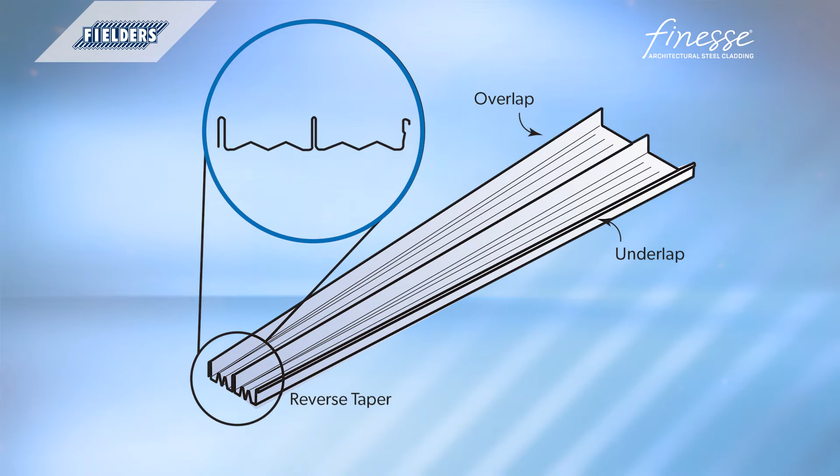The truly flexible Fielders Shadowline 305 is available as a flat pan profile at 305mm cover width, a fluted 300mm cover width with subtle concertina type longitudinal pan stiffeners, tapered with concertina type stiffeners running longitudinally in the pans, providing cover width varying from a wide end of 305mm down to a narrow end as low as 145mm. Shadowline is available in a 0.7mm base metal thickness.

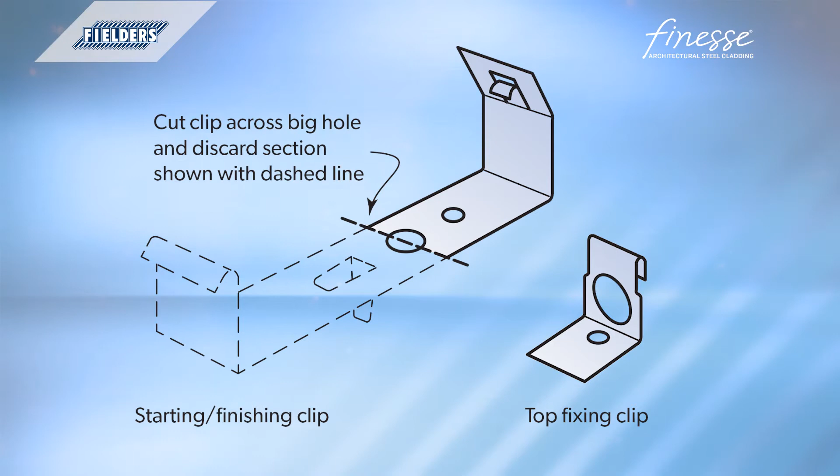Fielders Shadowline 305 cladding is concealed fixed to supports. This means that clips are screwed to the supports and no fastener passes through the sheeting. There are two types of fixing clips, a top fixing clip and a start finishing clip to fasten the first and last sheets in a roof area. Fix the clips using wafer head screws into either steel or timber battens. The concealed fixed clips for Shadowline 305 allow for some alleviation of expansion and contraction of the sheeting, and lengths up to 24 metres may be readily achieved.

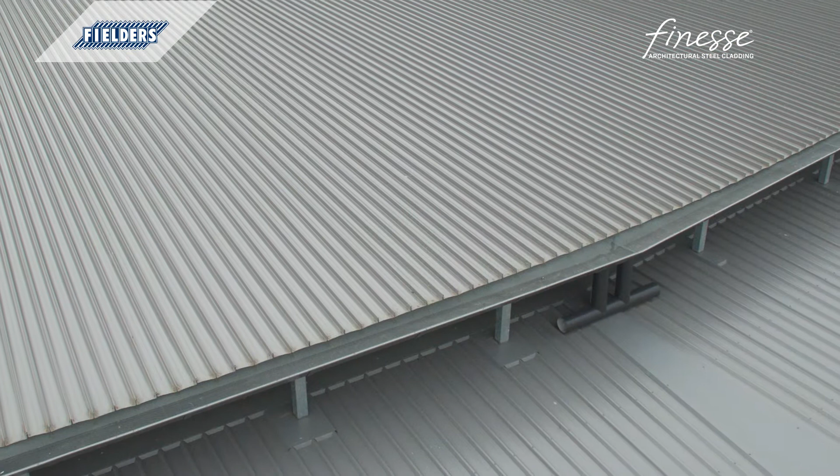A feature of standing seam roof profiles such as Fielders Shadowline 305 is that the roof cladding can be aligned with a vertical wall cladding to create a seamless flow from roof to wall. This feature is known as a mansard roof detail. More on that shortly, but first we need to prepare the fixing surface.

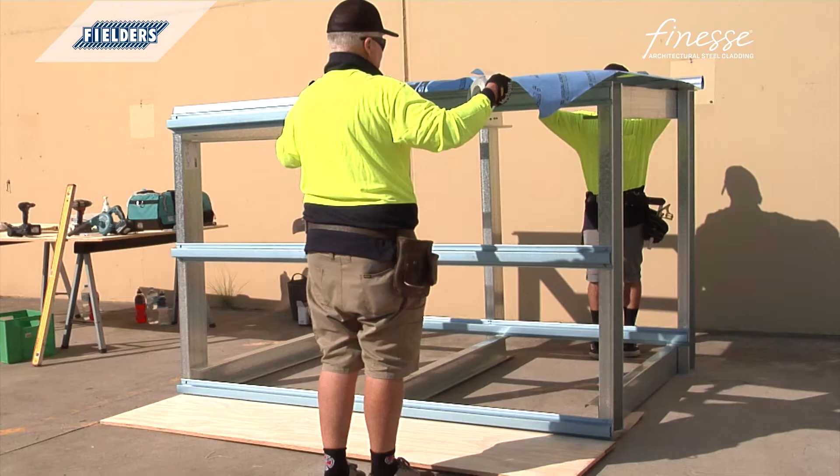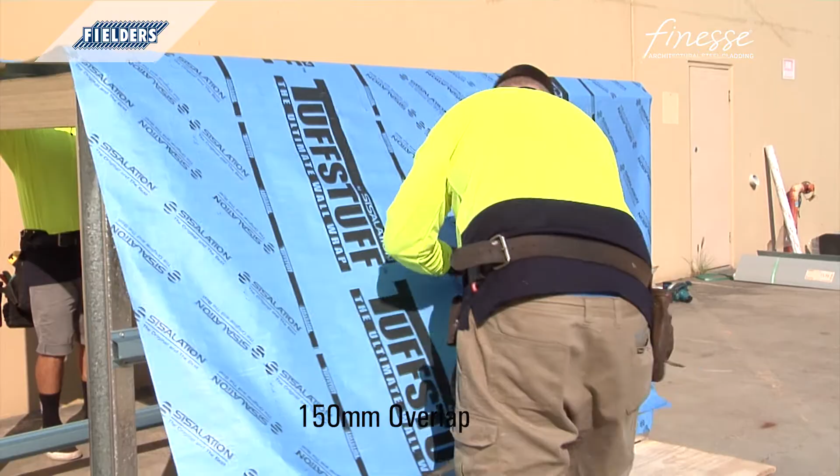It's good practice to install a heavy-duty roof sarking to both roofing and wall applications of Fielders Shadowline. Seal at the top. Ensure there are no ripples or puckers. Make all the laps in the sarking with a 150mm lap. Tape with Sisalation tape on at least the outside face. Best practice would be to seal the lap with double-sided tape first. Follow the manufacturer's installation recommendations.

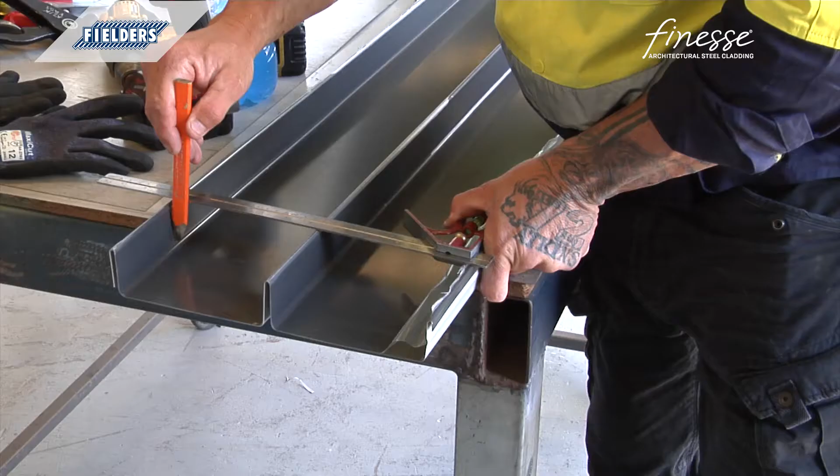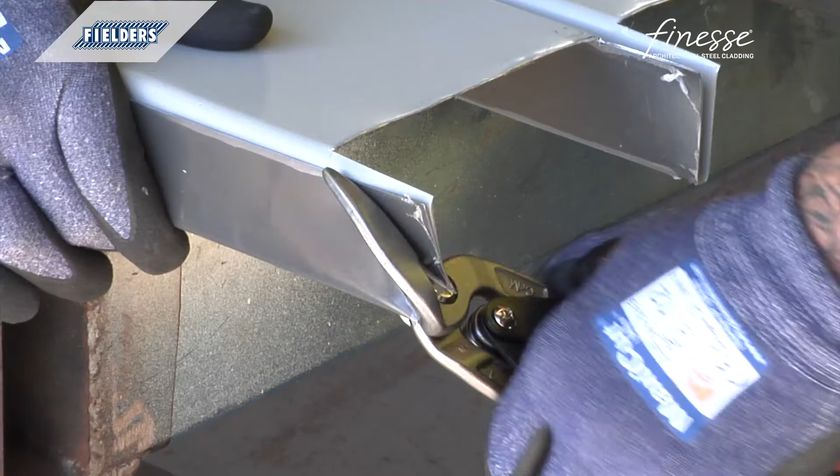With the mansard detail, you'll need to order your wall sheets over length to allow folding the pan and creating an underlap to the first perpendicular roofing batten. Similarly, the roofing sheets will need to be ordered over length to take into account the rib protrusion, so at least 50mm over length.

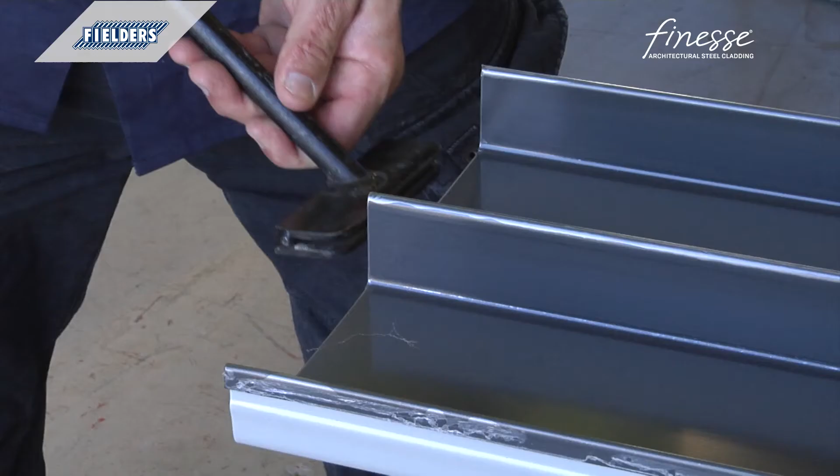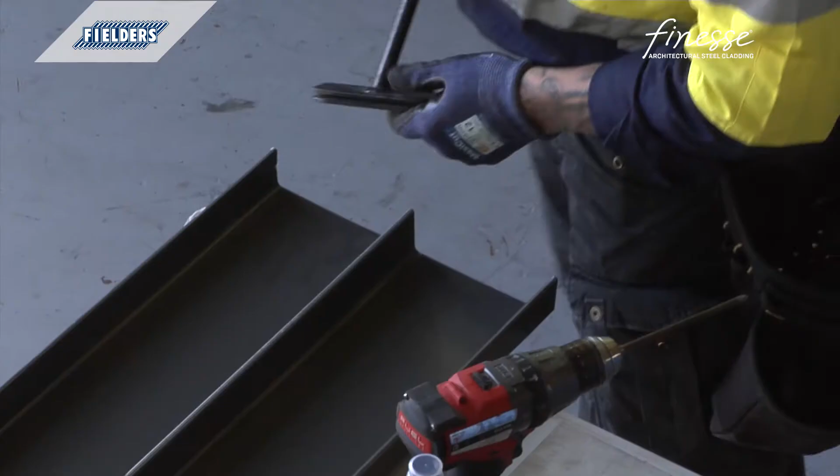A number of special tools are needed for Shadowline installation: a rib closer tool, a pan turn up, turn down tool, and the button punch tool. These tools are all available from Fielders. To create the turn up, at the top of the sheet, fit the tool over the end of the tray as far as it'll go. Then, push the handle to form a turn up as close to 90 degrees as possible. You can turn up sheets anytime. If you do it after they're fixed, make sure there's sufficient clearance to operate the tool effectively.

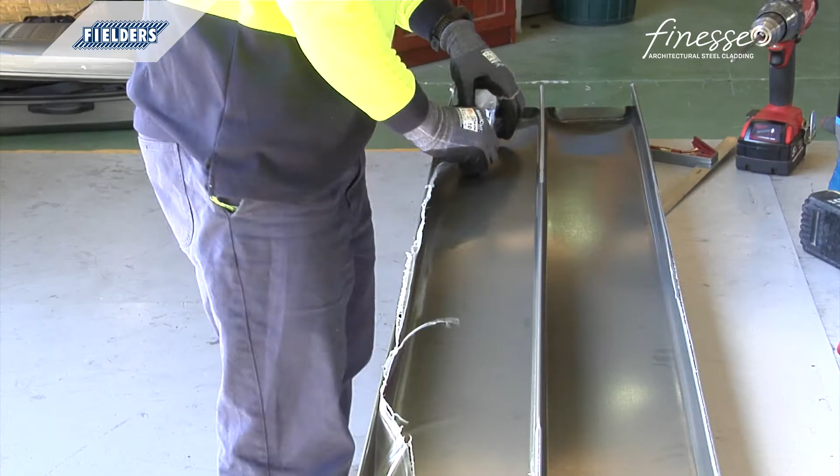For maximum weather tightness, lay sheets towards prevailing weather. Before lifting sheets onto the roof, check that they're the correct way up. Also, that the overlapping side is towards the edge of the roof from which the installation will start. You'll find this much easier and safer than trying to turn sheets on the roof. Place bundles of sheets over or near firm supports, not at mid-span of roof members. Remove the protective film just from the underlap rib as you go to prevent it getting trapped in the overlap. Only fully remove the sheet protection when work is complete.

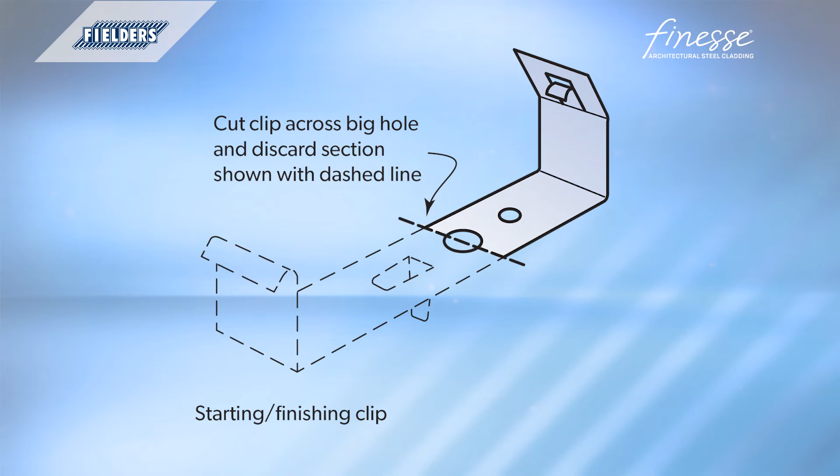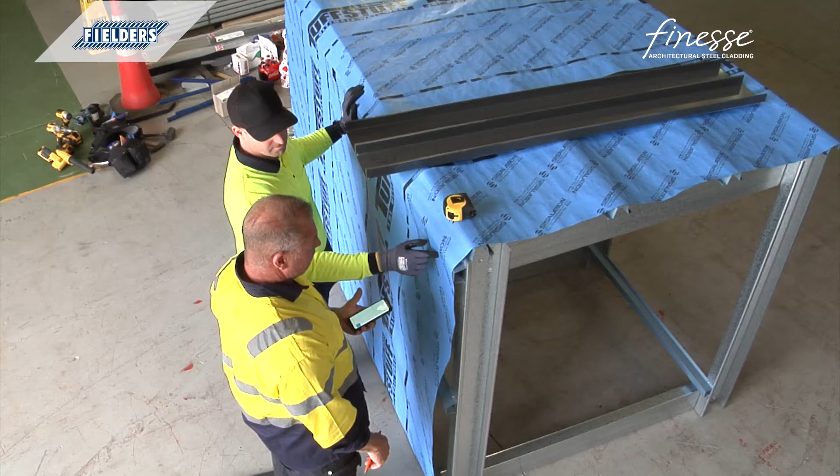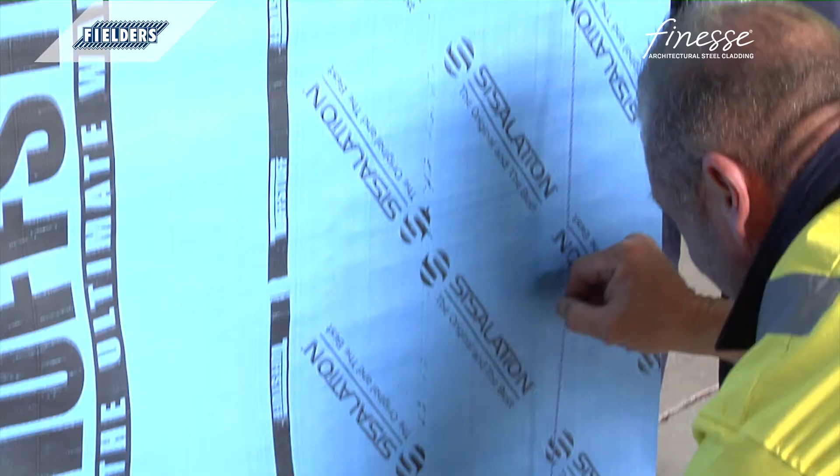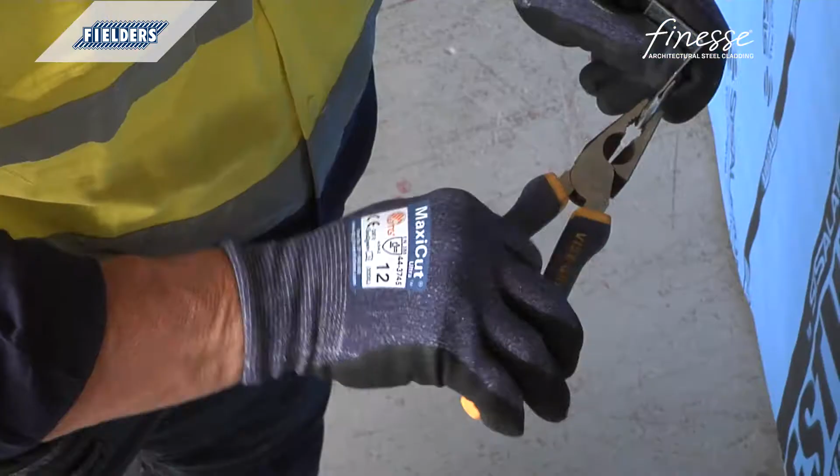In preparation for laying sheets, start by cutting all starting finishing clips across the big hole in the clip and discard the unwanted pieces. To ensure that barge flashings are equal on each side of the roofing run, attention should be given to aligning the first sheet, considering the roof run and sheeting cover. Determine the location of the first wall sheet and mark the edge of the sheet across the battens using a string line or similar. Prepare and fix the first row of clips to the wall and roof. Use either the prepared starter clips as outlined earlier, or if using the standard top fixing clips, flatten the fold over so that the clip fits more easily in the female rib of the Shadowline.

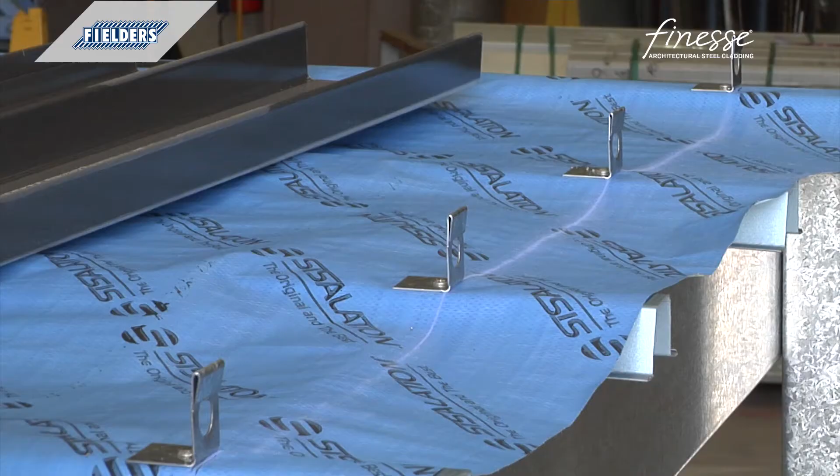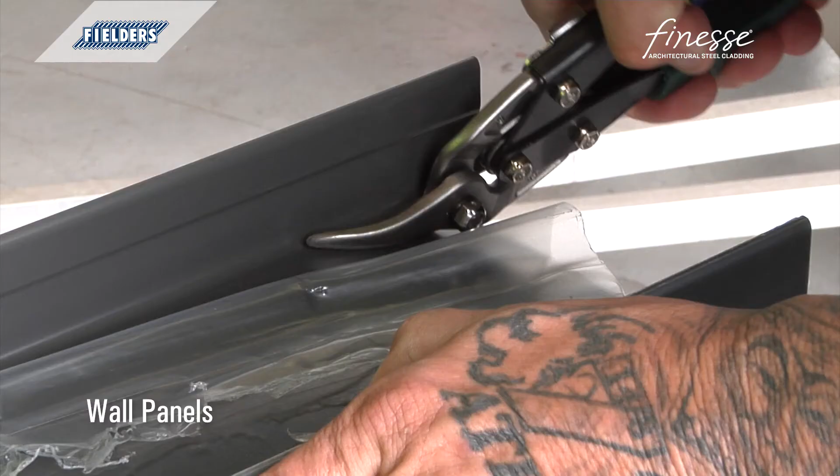Place the first wall sheet in position up against the clips. Mark the position of the fold in place at the height of the roof intersection. Carefully cut the pans of the wall sheet alongside each rib. Create a neat fold to match the roof pitch. Check in place. Use a rubber mallet if necessary to flatten the fold to match the roof pitch evenly.

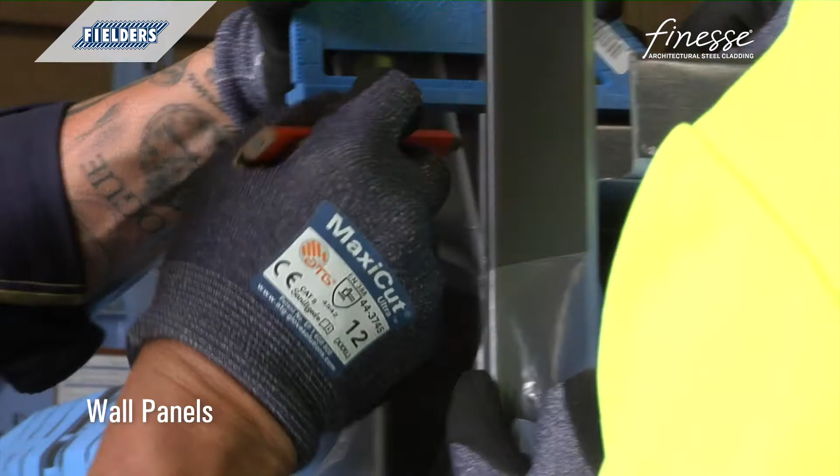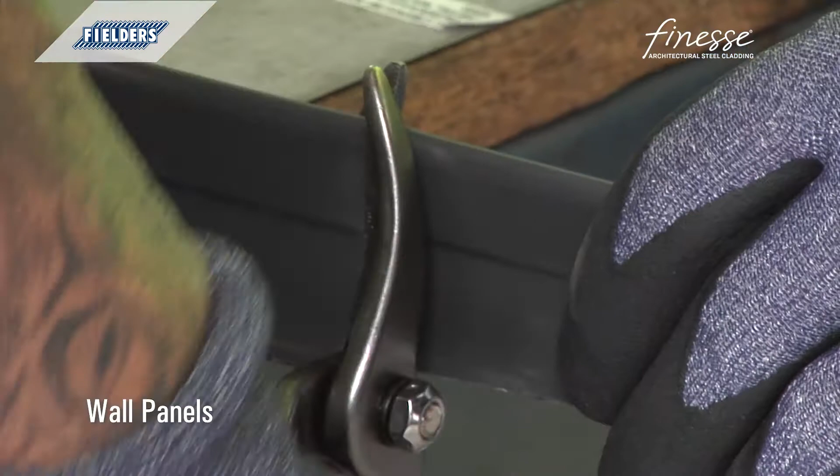Place a roof sheet in position. Mark the protruding wall ribs to the roof rib height. Cut the wall ribs back to roof rib height so as to allow the roof ribs to sit over the wall ribs. Now trim and flatten the protruding ribs to have as flat a profile as possible, again to allow the roof ribs to fit more easily over the vertical ribs.

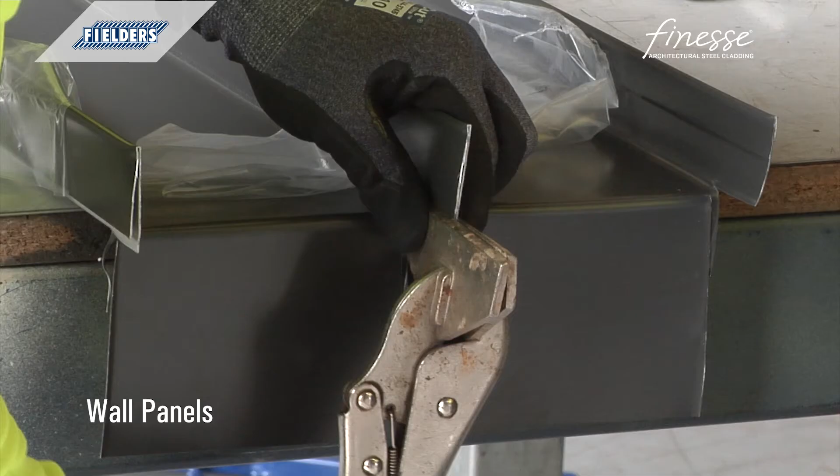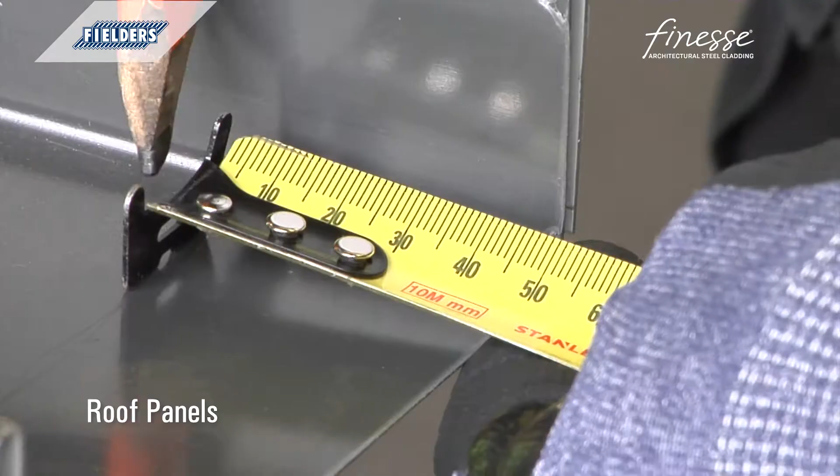Mark the roof rib pans to cut back to the roof wall intersection line in place or to the rib height of 48mm. Cut back the roof rib pans to form a neat edge at the roof wall intersection.

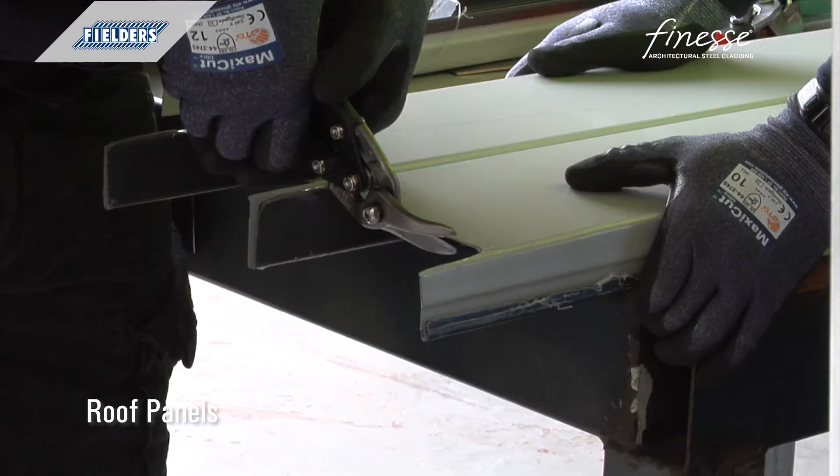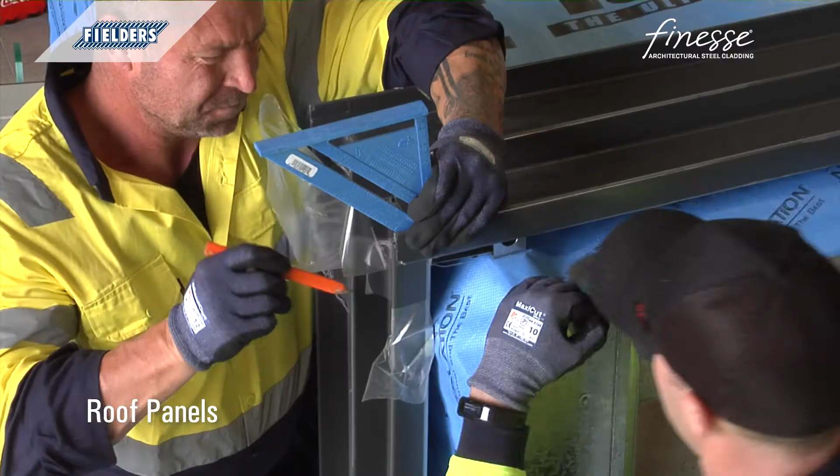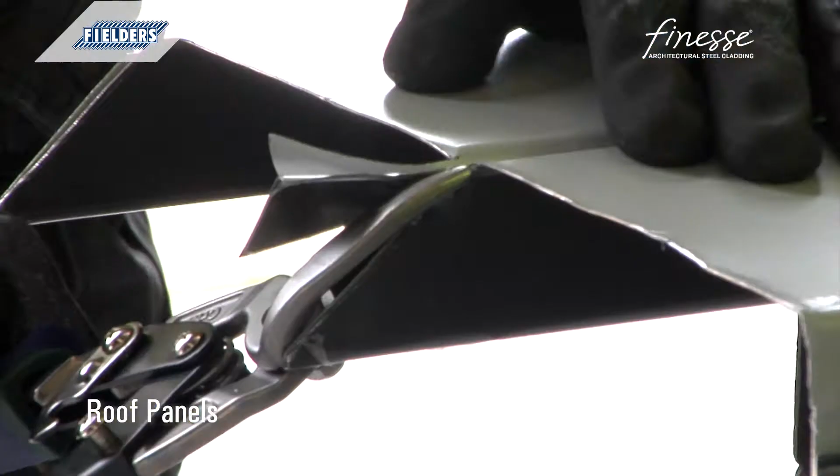Mark angle in place to cut roof rib angle to match wall rib protrusions. Mark the trailing male rib to cut and fit behind the wall end rib so that the new roof sheet female rib can fit easily over this end. Cut overhanging rib angles. Position in place.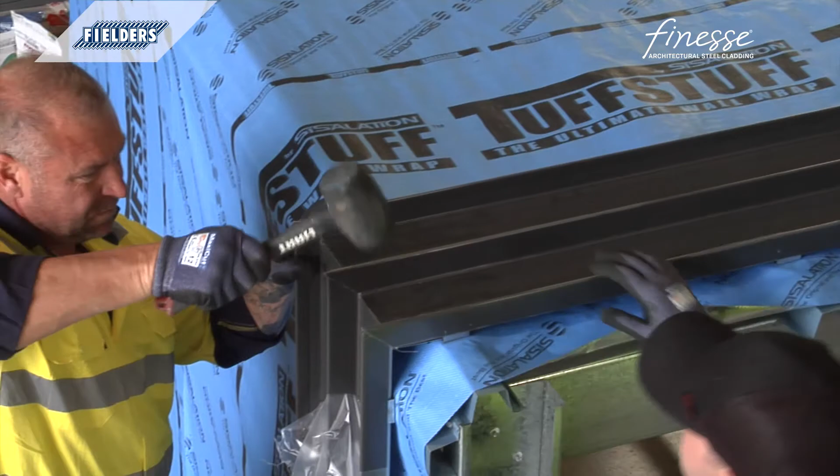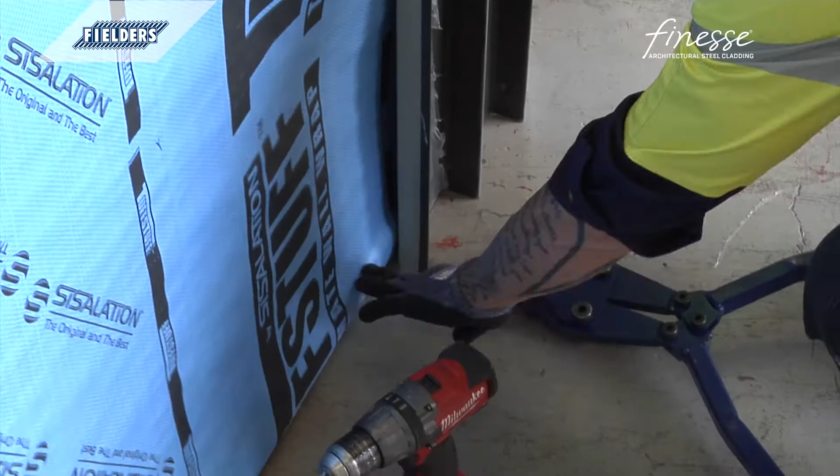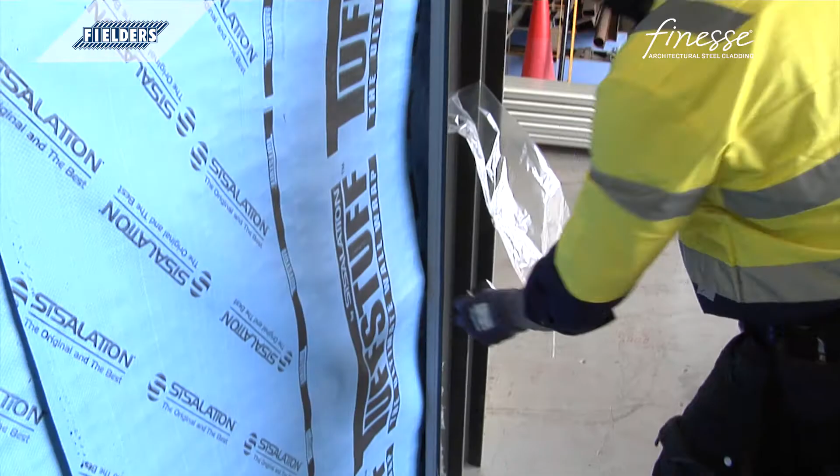When you're happy with the fit of both the wall and the roof panel, lock the wall panel in place along the wall edge using the button punch tool through the first row of top fixing clips or by folding over the tabs of the starter clips. Use the rib closing tool to squash the male rib at the locations where the clips will be fitted. Fit and screw clips to the battens over the male rib. To locate the clips in the later locking operation with the button punch, you might like to make a small mark in the pan with a felt tip pen.

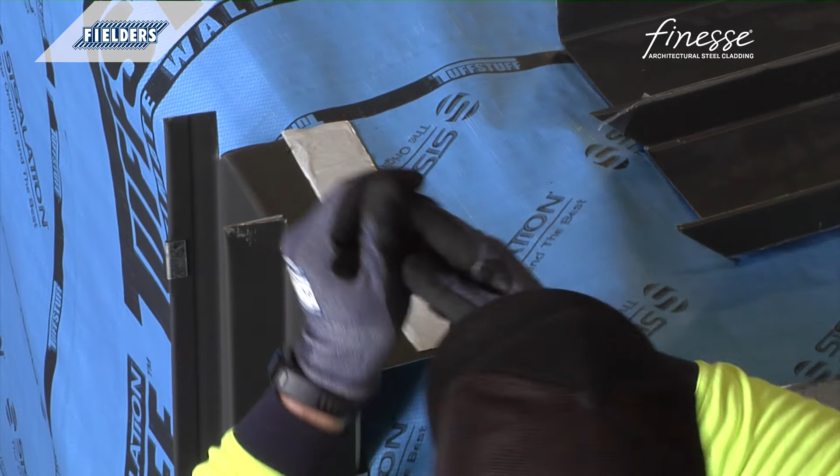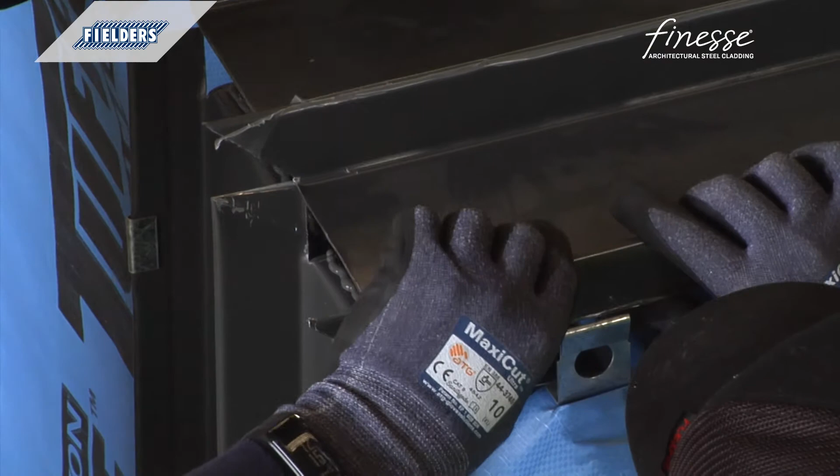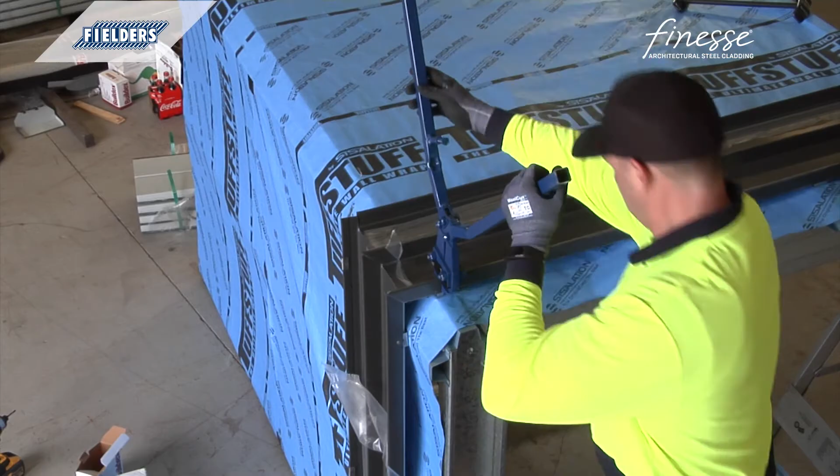Prepare the overhanging wall panel flap to receive the roof panel with double-sided butyl tape and silicone. Fit the roof panel. Fine-tune positioning as necessary with the assistance of a rubber mallet. Lock in place with a button punch or fold over the tabs of the starter clips.

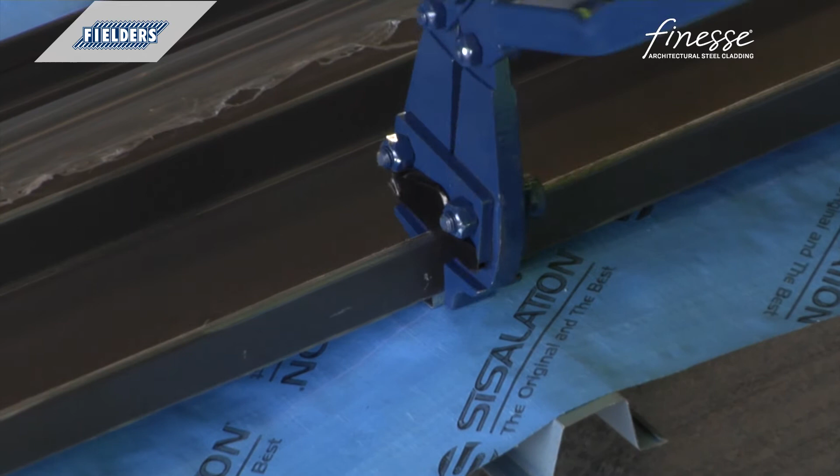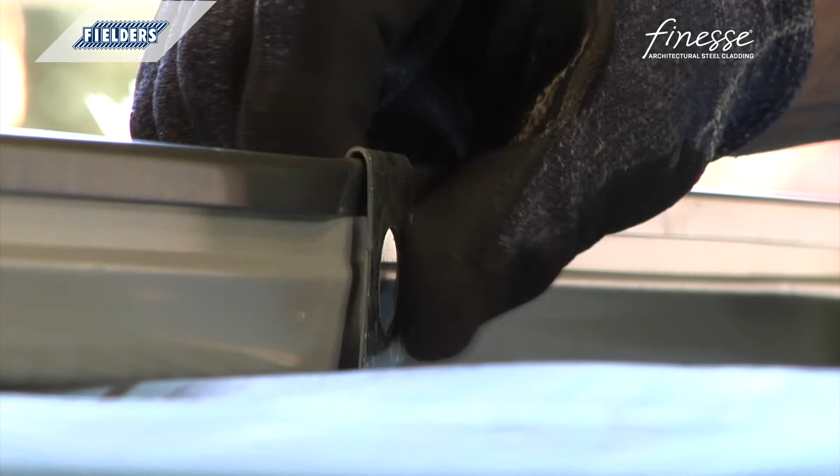Fit clips on the opposing side of the roof panel, using the rib closing tool to squash the male rib at the locations. Screw fix the clips to the battens over the male rib. Again, to locate the clips in the later locking operation with the button punch, you might like to make a small mark in the pan with the felt tip pen. Continue and fit panels in pairs, fitting each wall panel first. Mark, cut and create the fold-over.

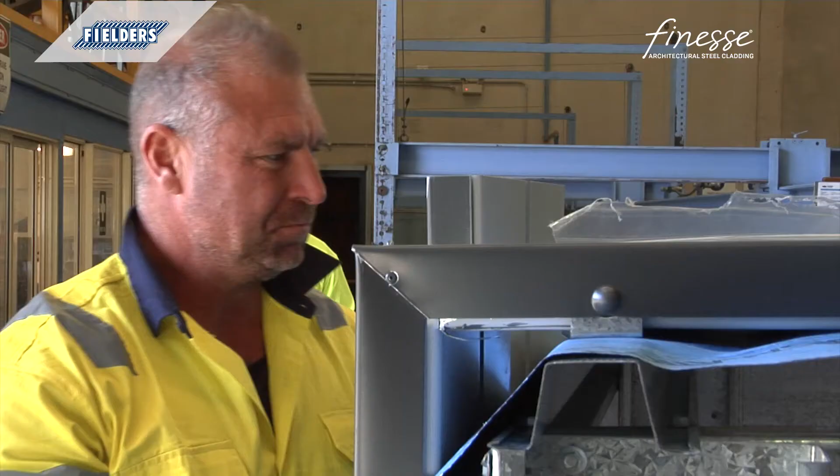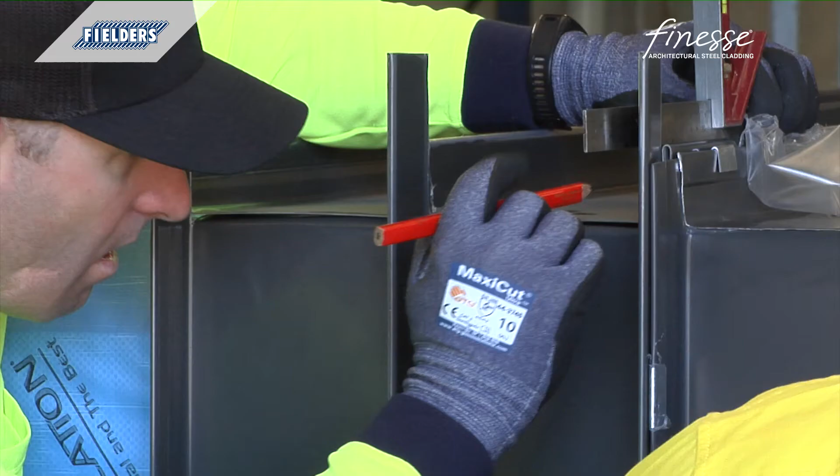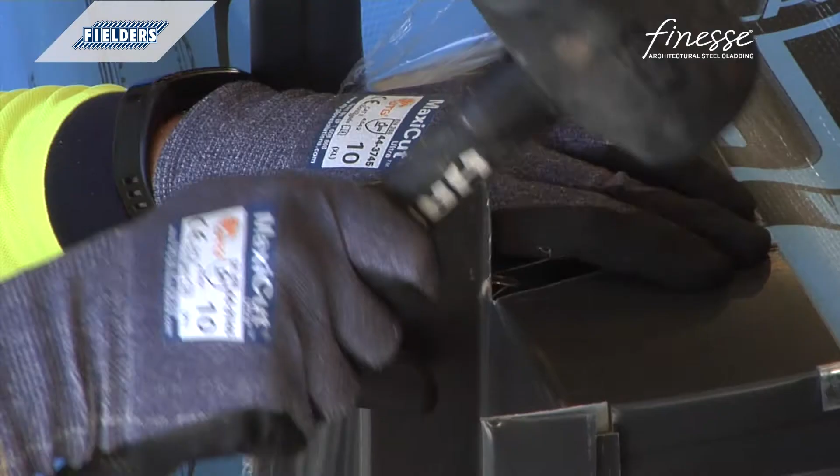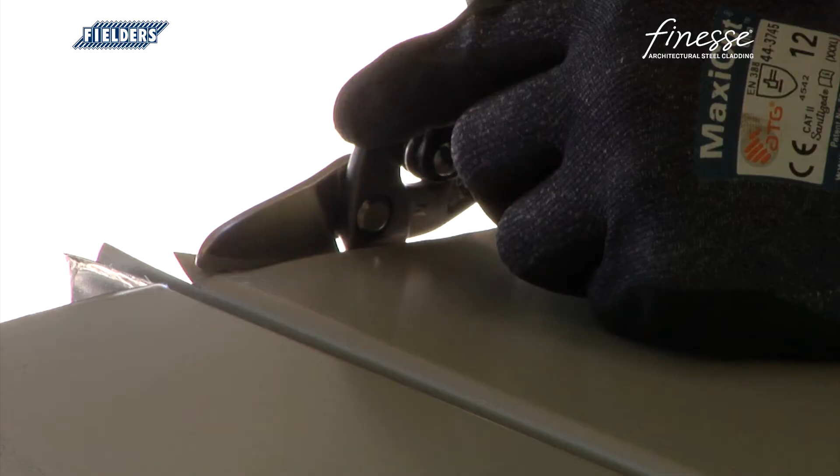With the roof panel in place, mark the height of the wall rib protrusions to cut back to. Squash the cut wall rib protrusions to help the roof panel to fit over. Fit the female wall rib over the preceding panel's male rib. Make sure it clicks over the full length. Tailor the fold to the roof pitch with the aid of a rubber mallet. Prepare the roof panel by neatly cutting back 48mm, leaving the ribs to overhang. Mitre the visible ribs, but cut back the trailing male rib to sit behind the protruding wall rib.

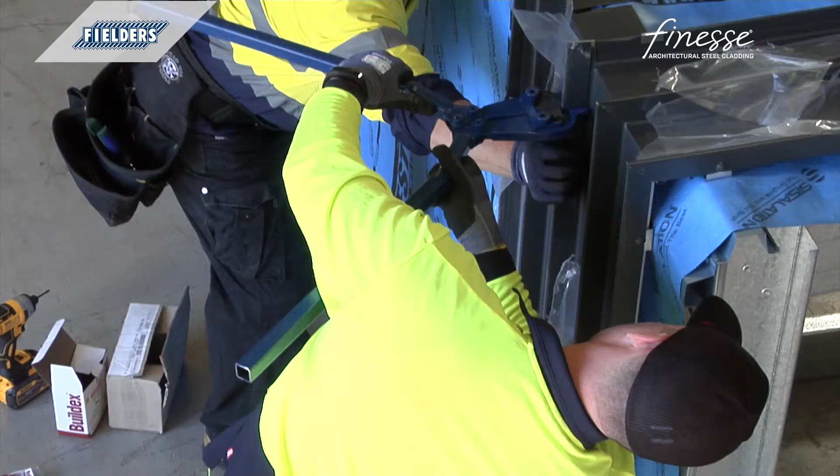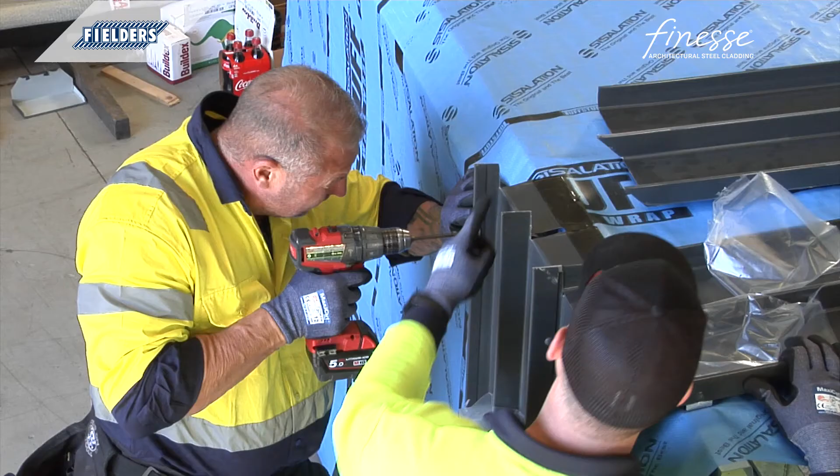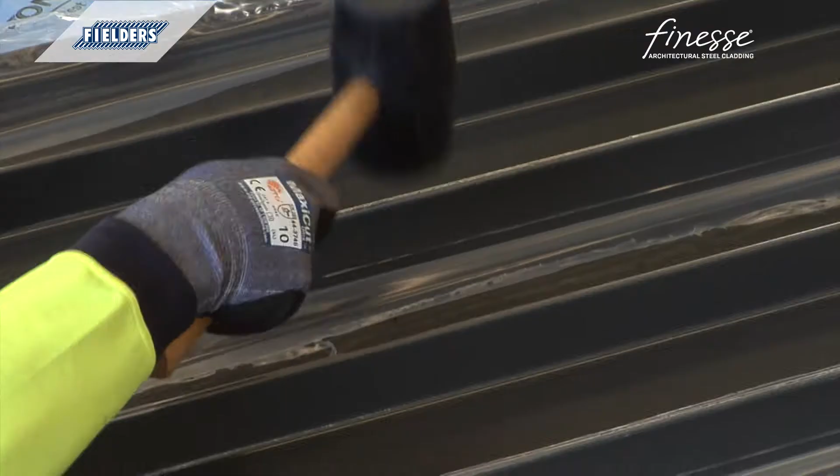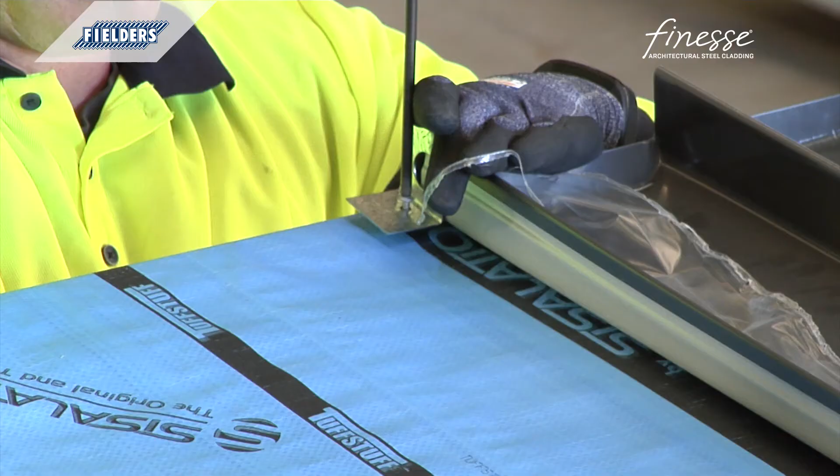Once you're happy with the fit, lock the wall panel in place. And fit clips over the trailing edge. Butyl tape and silicone the fold over. Place the roof panel in position. Then flatten the rib and fix clips to the roof battens. Button punching the wall sheets can be done as each sheet is fixed. However, roof fixing through the non-perimeter area may be more efficiently done after all the sheets are laid.

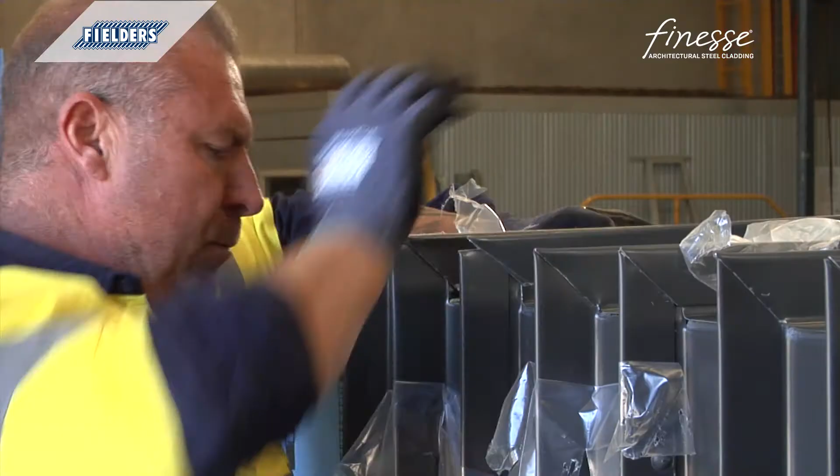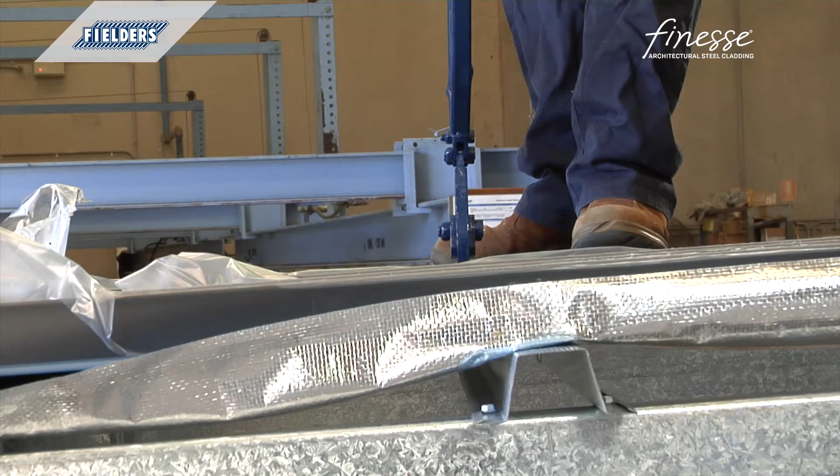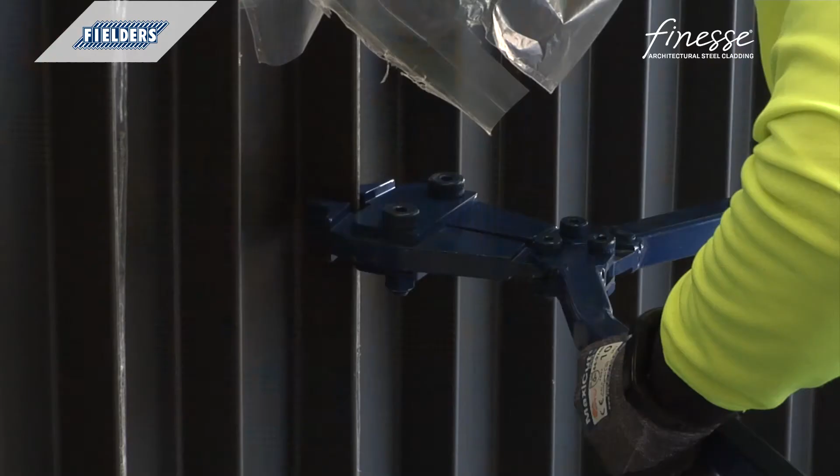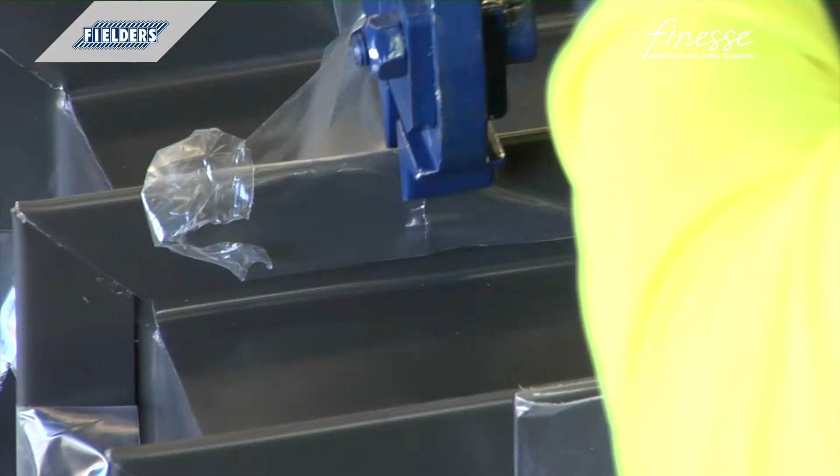Lock all lapped ribs along their length by button punching at the clips and, if necessary, between the clips, typically at 900mm centre to centre. When operating the punching tool on the roof, stand on the pan of the overlapping sheet to ensure that the sheets are fully engaged. Button punch through the hole in each top fixing clip. Locate the clip with the pen mark made previously, or measure to the centres used to set out the clips. Punching to a string line guide stretched across the sheeting is recommended, or a similar straight edge technique, as random punching mars the appearance of the finished work.

Assess how the last sheet will fit in relation to the fascia flashings. If using the pre-cut starting finishing clips, fix in position to the purlins and girts. Place the last sheet over the finishing clips and bend the tab of all clips over the rib. Or if you're using the top fixing clips, fix the final sheet by button punching the final row of those.

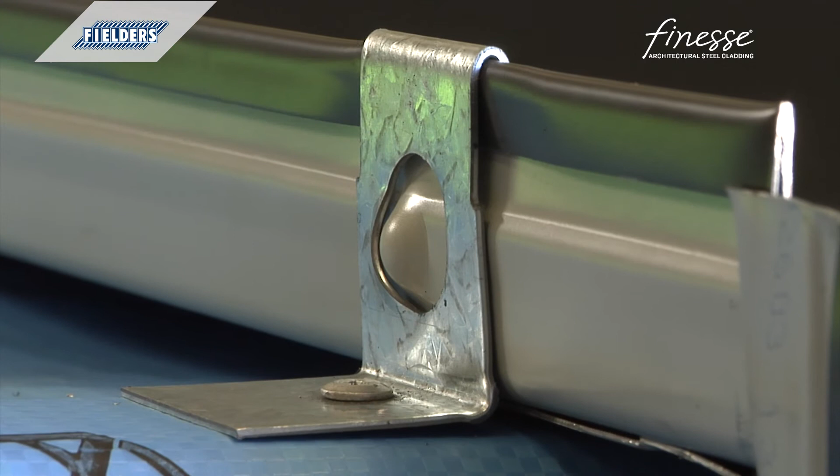Let us consider wall and barge flashings as one process. The Australian standards for designs of flashings are referenced in both HB 39 2015 and the online Finesse Design and Installation Manual. Our manual covers the common roof flashing detail, including hip and valleys. Fielders produce all of these and any custom flashings to suit your individual requirements.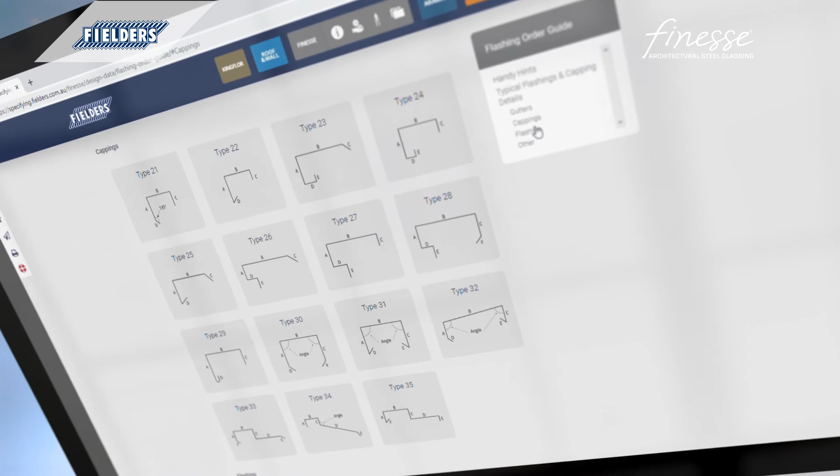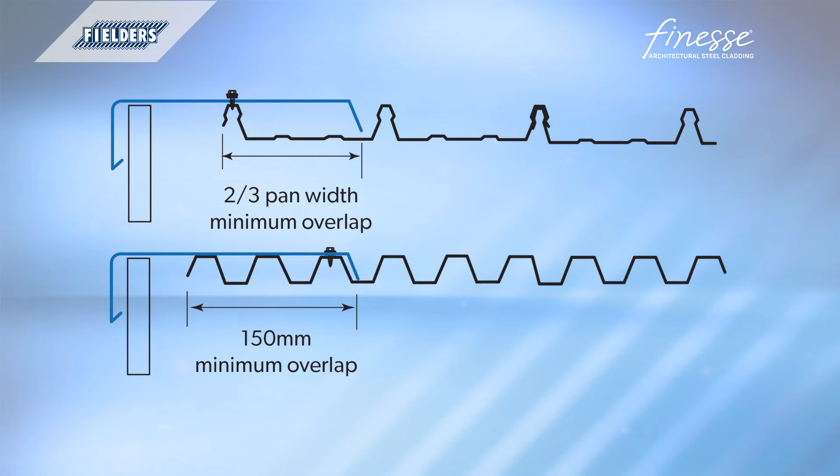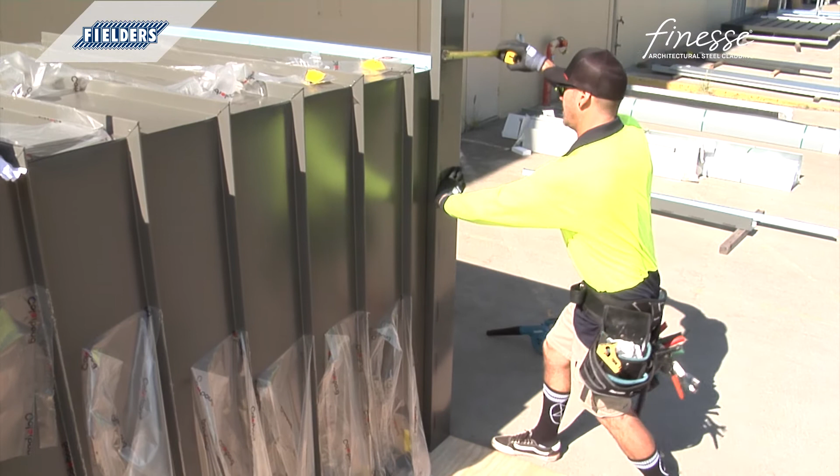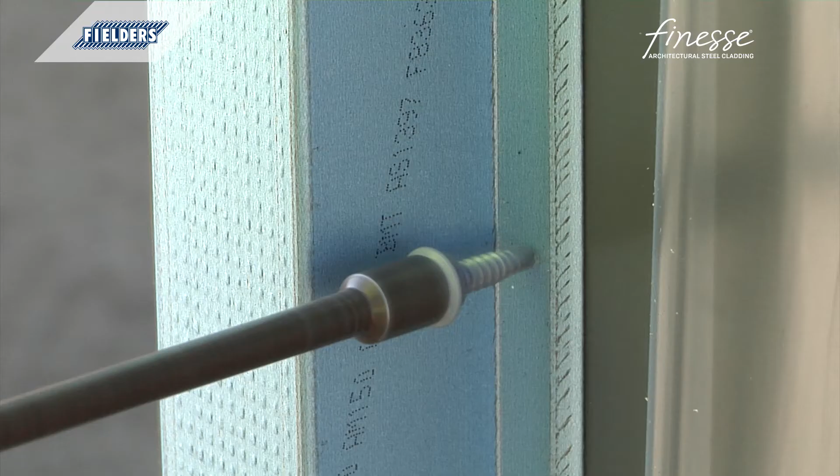The barge flashing needs to cover from the building external wall to over the sheeting first rib to provide a weather-tight solution. The fascia capping process is the same as for other standing seam profiles like Fielders Prominence, demonstrated here. Set up the vertical cap before the barge. In situations where the barge top face exceeds 240 mm, install a top span 40 batten at the midpoint between the external wall and the first sheeting rib to support the barge capping. Use screws with a neoprene washer to ensure the right amount of flex between the sheet and the batten.

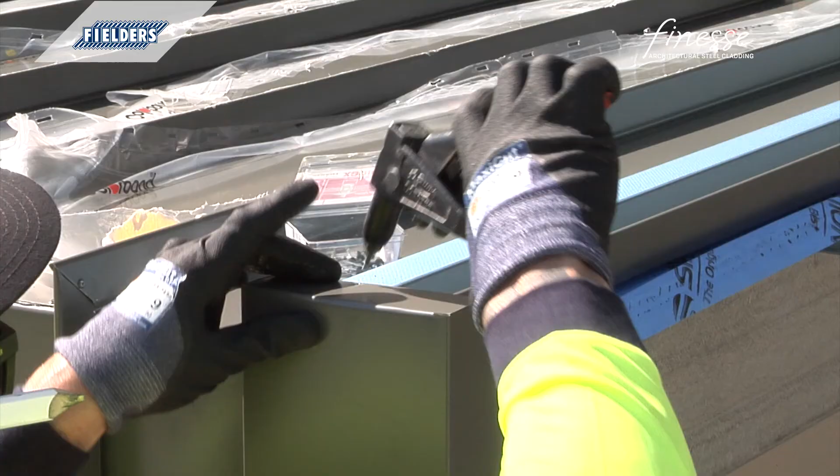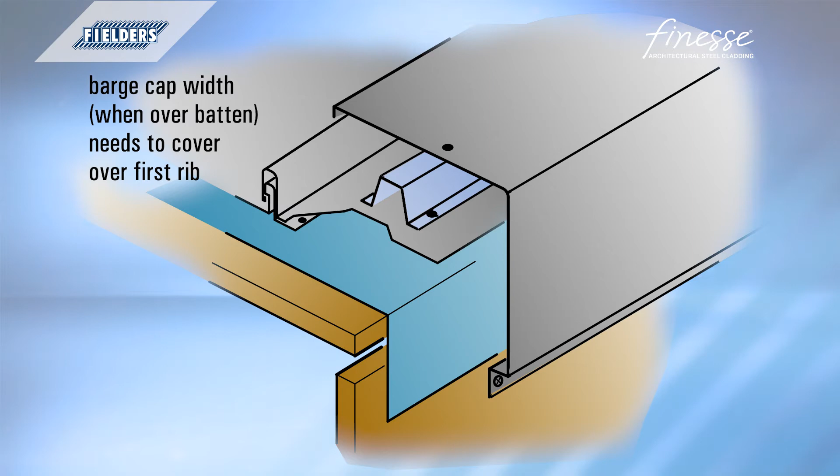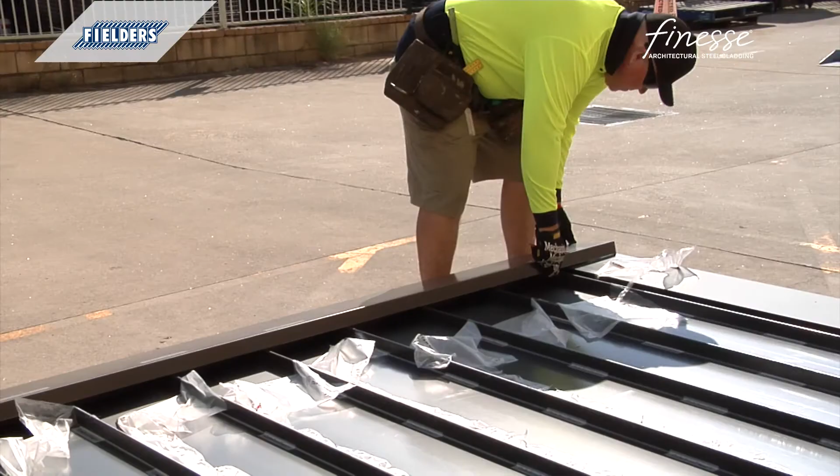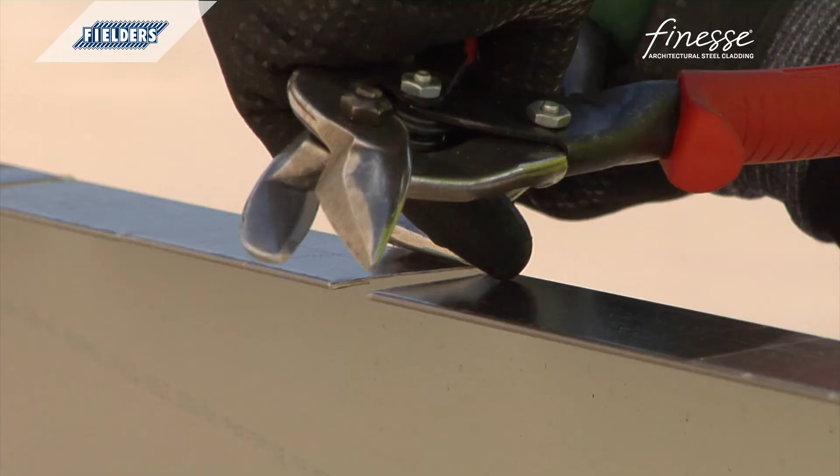Create a fold at the top end to allow for riveting the corner flashing to the roof batten. Complete roof flashing detail, mitering the visible corner to create a neat overlap. Fit the top span support as per the wall capping. Design the ridge cap to cover the top of the roof sheet by a minimum of 150 mm to allow the toes of the ridge flashing to sit well into the roof pan. Lay the ridge cap over the roof sheets in place and then mark to allow notching over the ribs and detailing around the barge top ends. Notch and cut. Ensure a good fit.

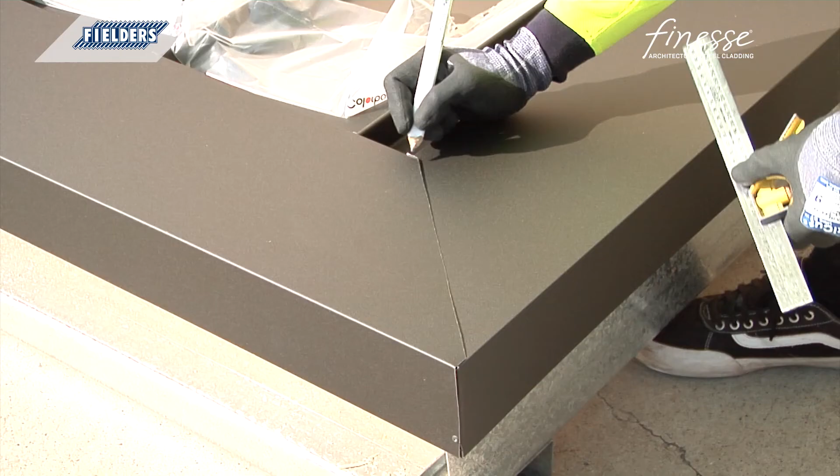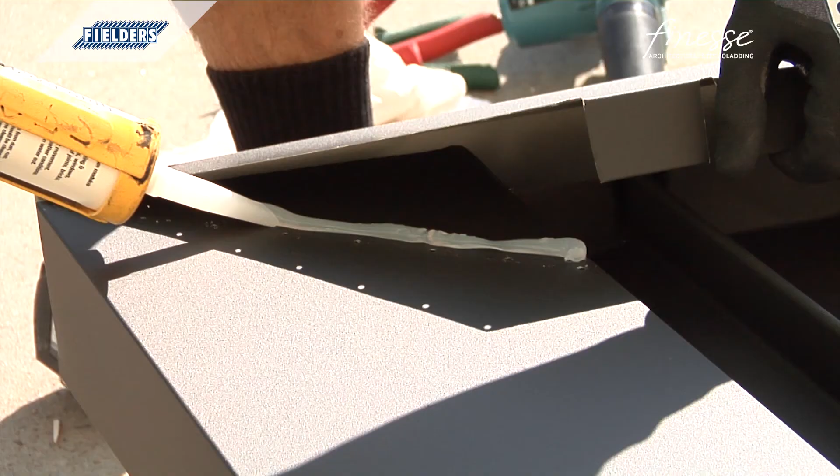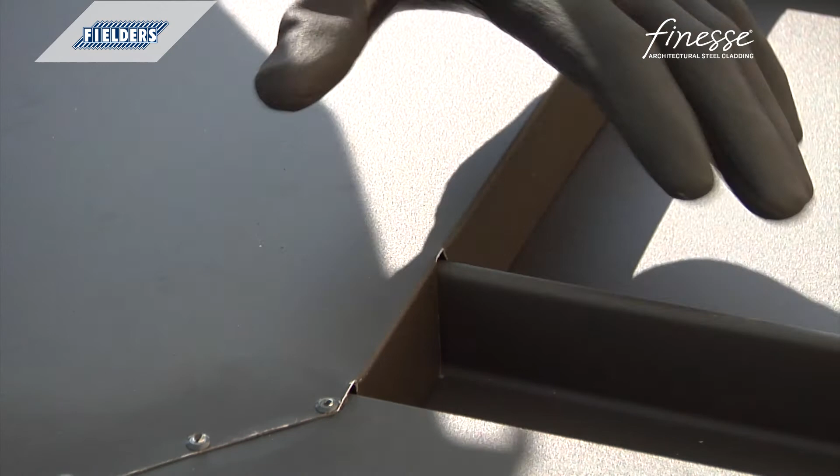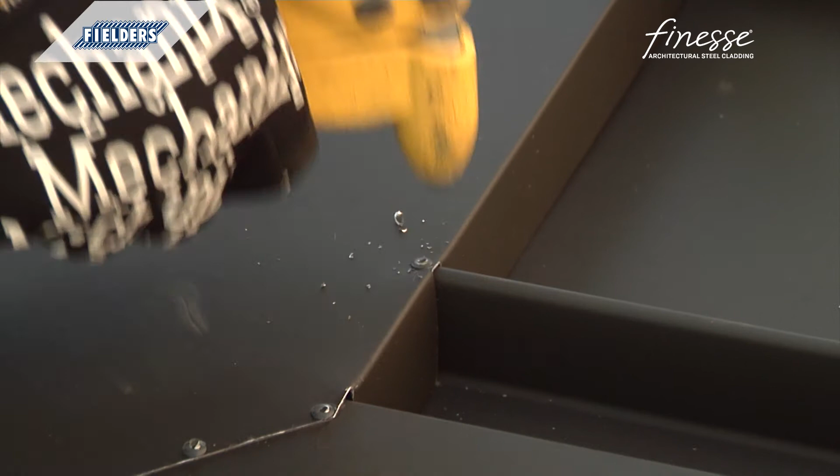Across the ridge barge junction, mark 40 mm centres in preparation for drilling rivet holes. Remove swarf. Ensure a good silicone seal and rivet fix. Drill and rivet fix at each ridge. All longitudinal flashings need to be screw or rivet fixed at a maximum 900 mm centres. The final task is to remove any protective film left on the sheets and give the completed surface an overall clean to ensure any missed, potentially rust-staining swarf is removed.